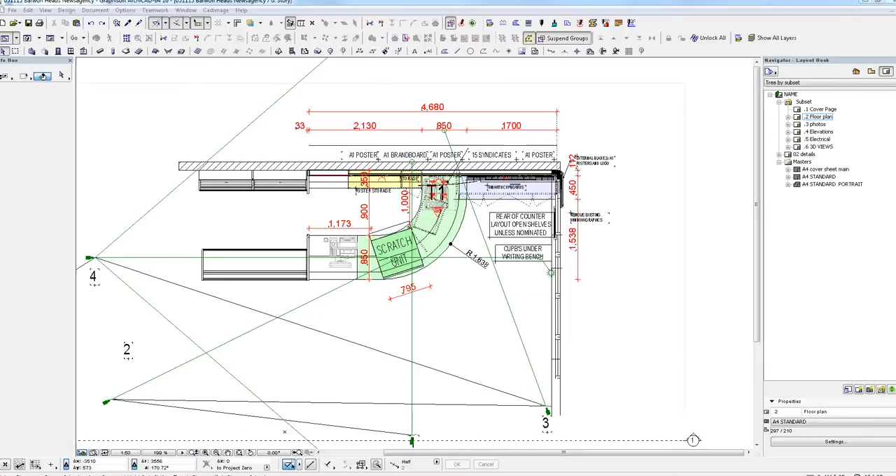Okay, this is the job you do. Upon opening it up, I can immediately see something wrong with it.

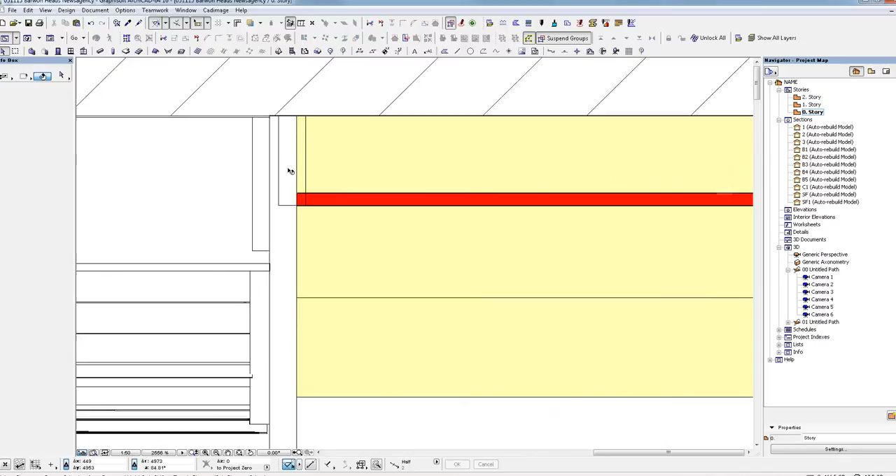This is just a hatch that should be all the way to the end there. Same with this yellow, it should be all the way to the end. When you did your marquee stretch, I'm not sure how you managed it, but you stretched this across, but you didn't take the hatching with it.

Okay, this is T1. You're missing, there's supposed to be a T2 here. There's no PowerPoints. There's supposed to be PowerPoints for each terminal.

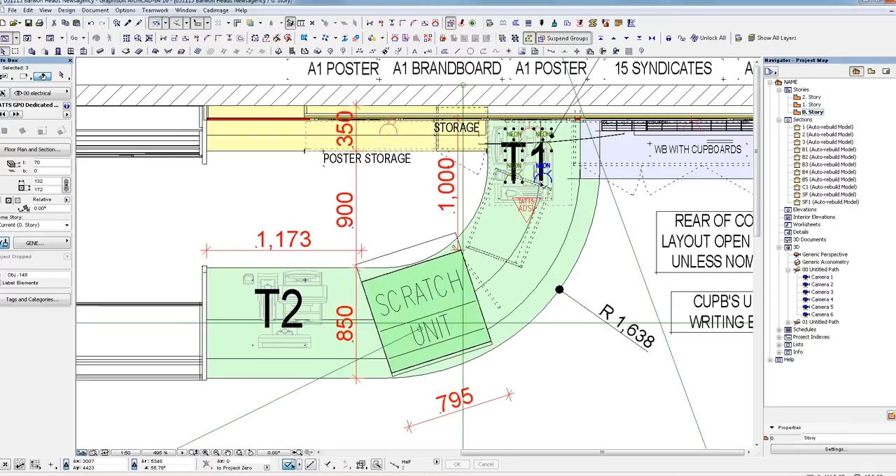Essentially, I guess this is a C grade. I'll pause the video for a second, and what I'll do is just load up the image.

This one only has a space for a second one, and if you look at the photos, it looked like they never did an upgrade to this one here. They never upgraded to that style.

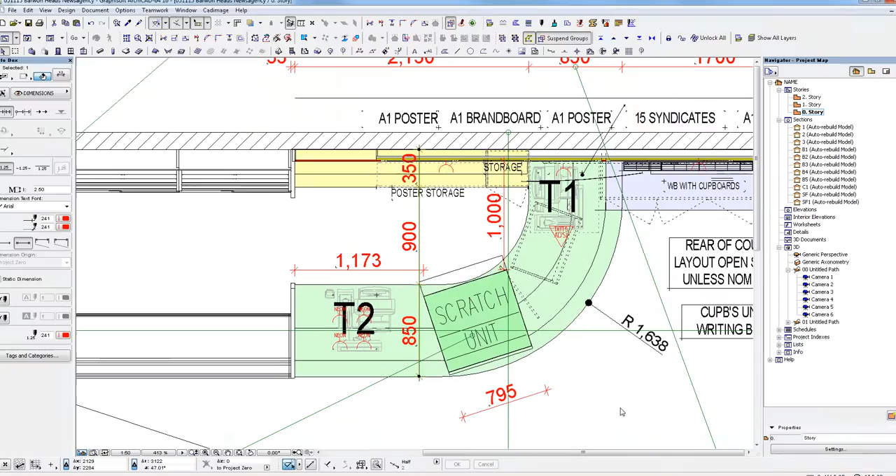You see my doorway here? The way I can see that it's a door, I can see that it's a sliding door. But with your one, I can't see what it is.

So this is the final plan that you sent. I'm not actually able to see what's going on there. I don't understand what's going on here.

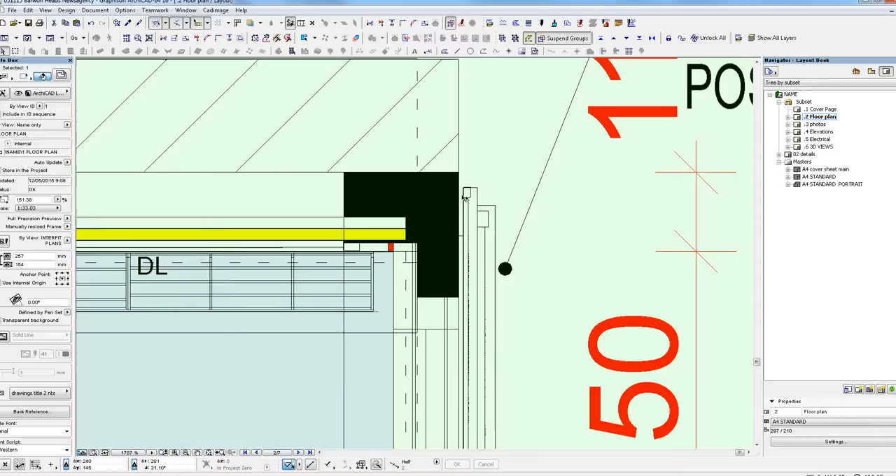I get that sometimes there's some funny things going on with the profiler, and it does mess up a little bit. I'm going to go back into working space now.

You've got, I can see that's the red panel, and for some reason we've got a poster here.

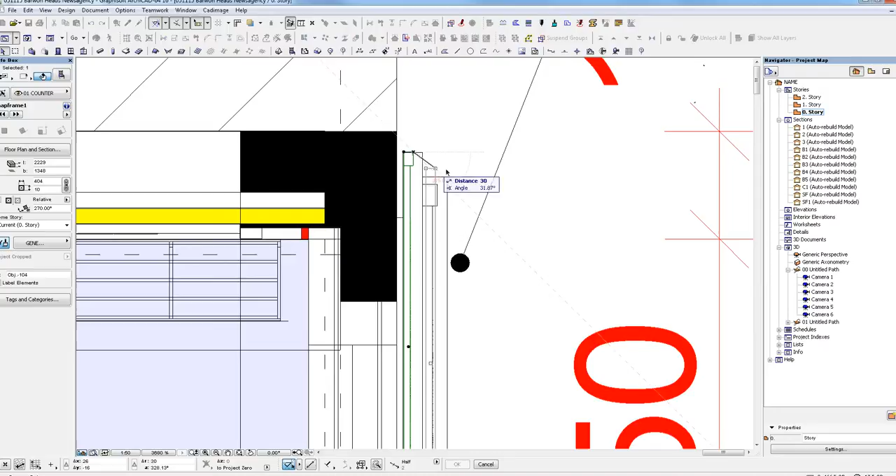So let's just have a look at that in 3D. I'll just quickly look at that in 3D. One thing you should always do is actually look at your drawing in 3D.

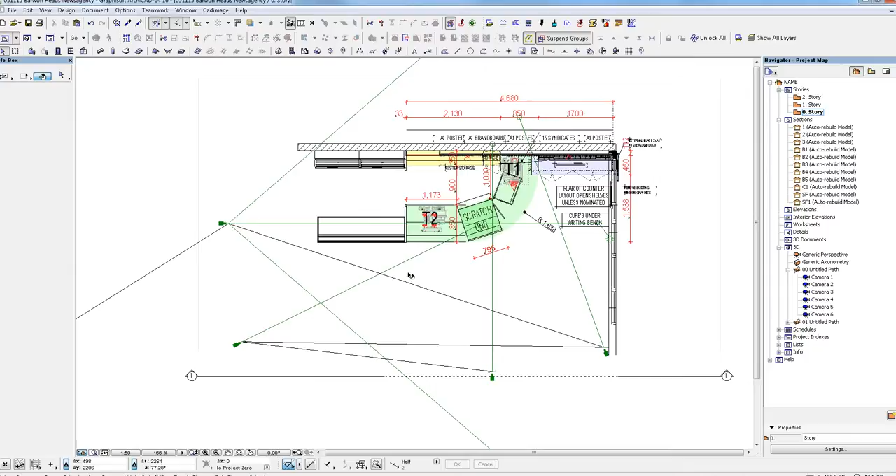These numbers that you put here, I don't want numbers. You don't need numbers. Don't move numbers, just move. It doesn't matter what is what with those.

For this one, what I would have done, let's see, number one, I would have put one there and one there. Just forget about this, the shape counter is just all wrong anyway. It's all wrong at the moment.

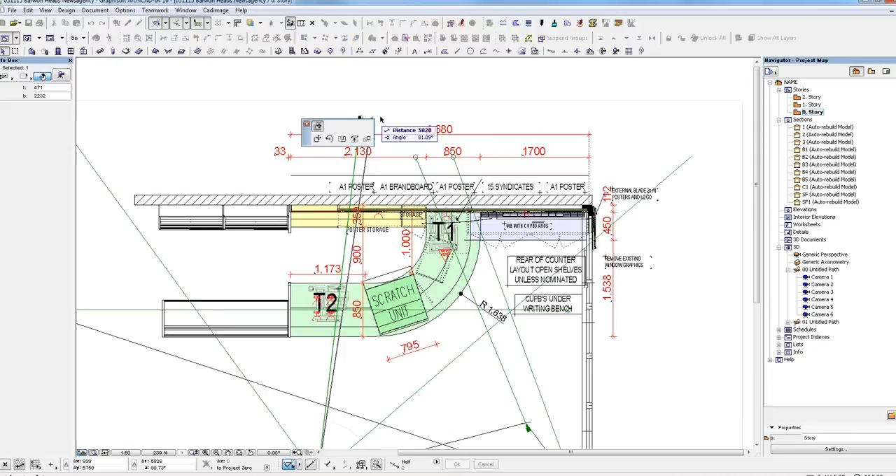So I will redraw it on video so you can see it. Now, you need to have one camera looking from the outside of the shop, looking in, so that we can see this blade.

So you don't, that's one too many cameras. You don't need an extra camera. So that's all you do, you just place the cameras. The main focus is this area.

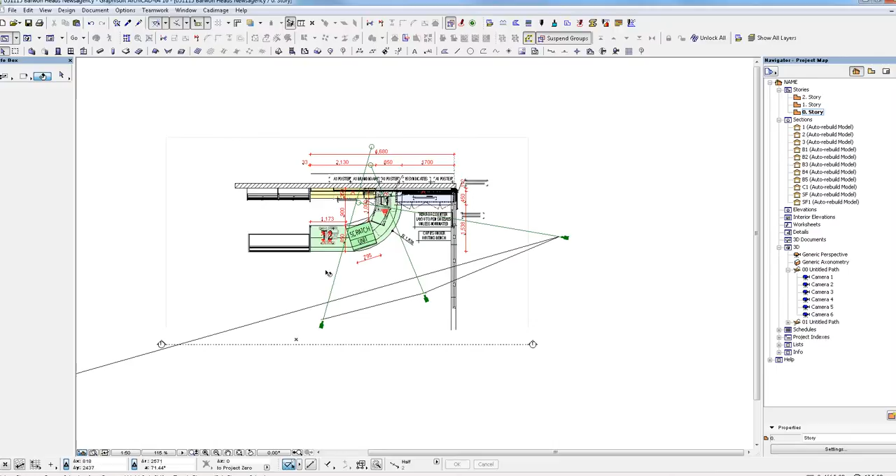Now I can see you've done line drawings for these. Yeah, don't do line drawings when the counter—

Hang on, because you deleted it, I've got to put it all back on. So that's fine.

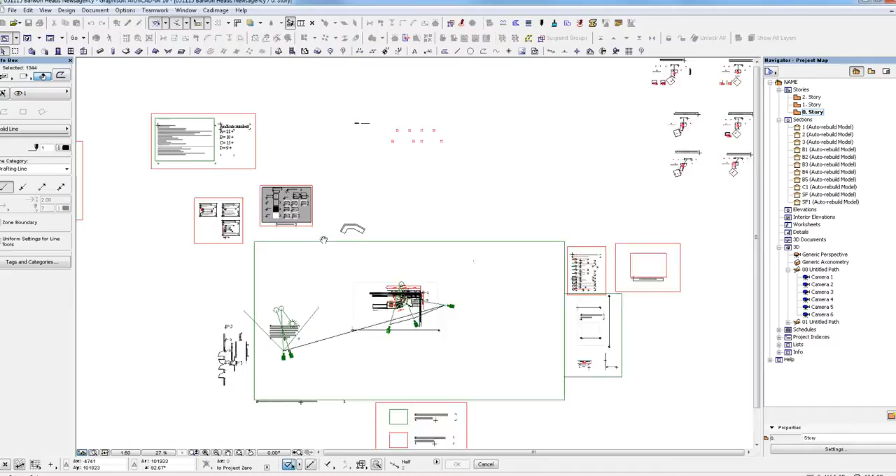Drag it. The counters are here, and you can just grab this existing counter, bring it down, and drop it there, and it's done. It's all done.

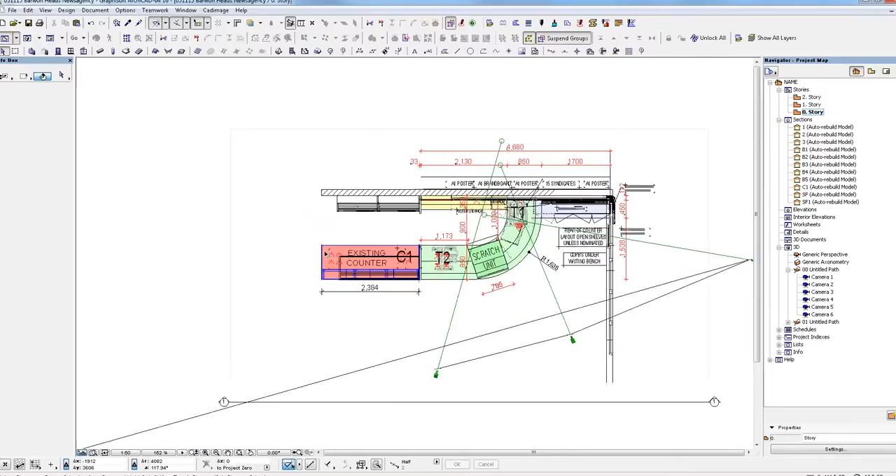You spent time drawing lines, didn't need to. You can even shorten this because it's a 850, so I'm going to take 150 off.

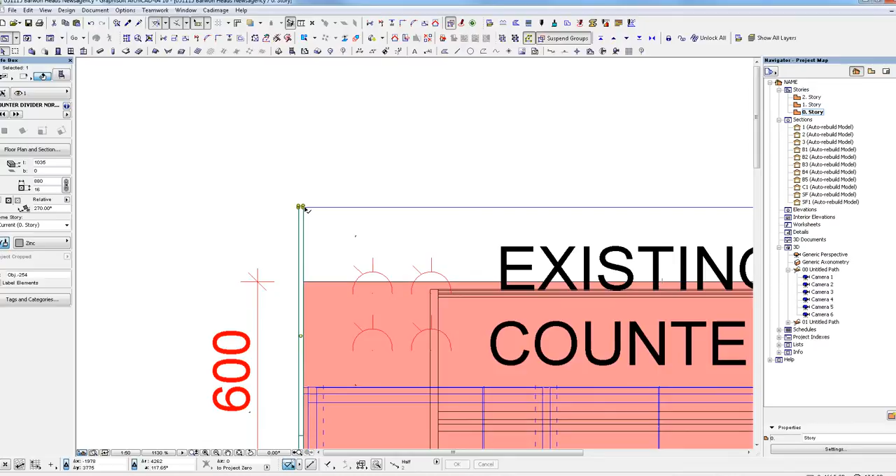If they're requesting 600 deep, it's not a request, this is what's existing. I've got one more 100. If this is existing, it's an existing 600, then you'll just use this too.

It doesn't matter, it's not important because it's existing. So potentially try not to draw anything that's existing or spend too much time on it.

But now that's all grouped. That should also, I should just delete that one.

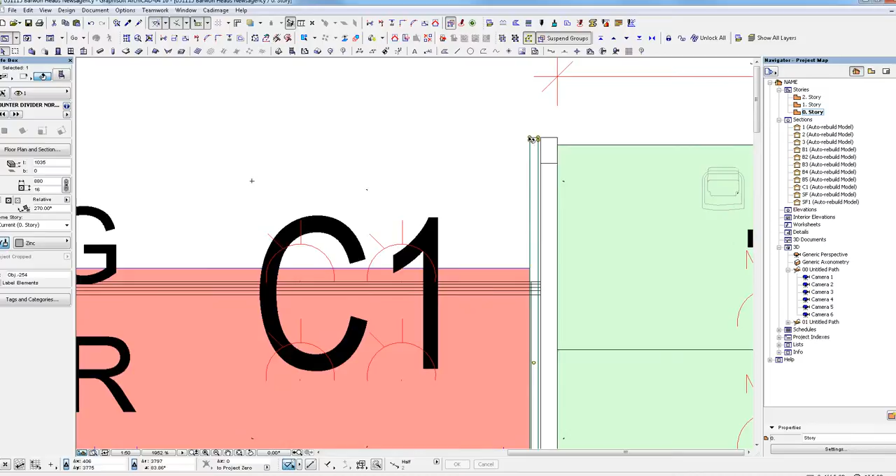But I'm sure there is a measurement for that. There isn't, there's no measurement for that. Right, cool.

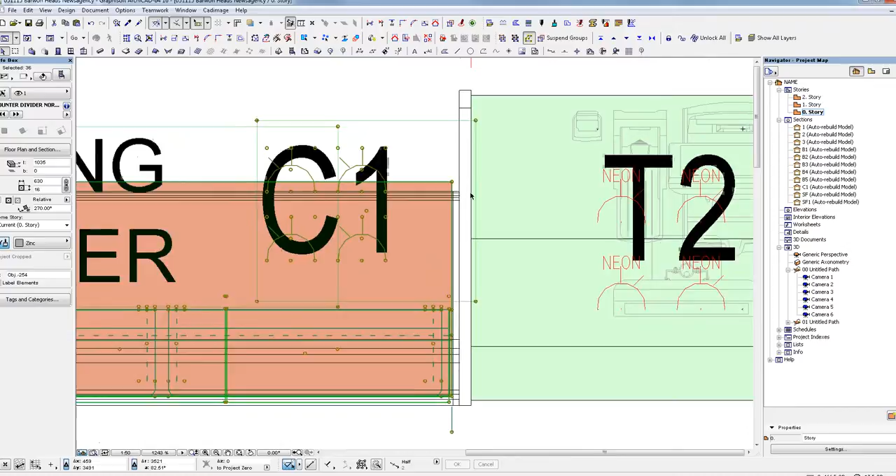Makes it interesting then, doesn't it? So just keep things easy for yourself and just use the library parts that I've got created. You should never really have to do line drawings.

Yeah, you should never have to do line drawings, so I'm just going to delete all those. I hate that, the one that doesn't turn off.

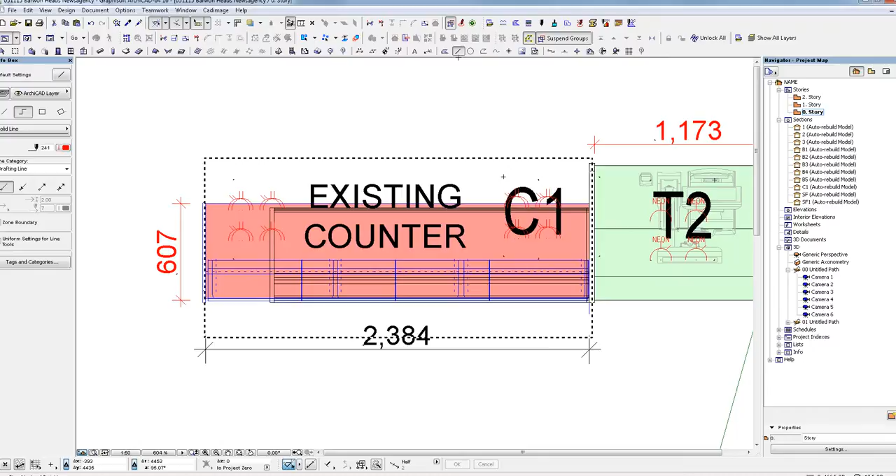Don't worry about this. When it's an existing counter, you don't need to specify where it is. Sometimes you do, but beautiful big letters, existing counters, and don't even mention it. Don't even worry too much about it. But the important thing is these measurements here.

4680 from the front to there. Now that's obviously for the back wall. So they haven't given us a proper measurement to there, so I'm just going to assume that that's in the same line.

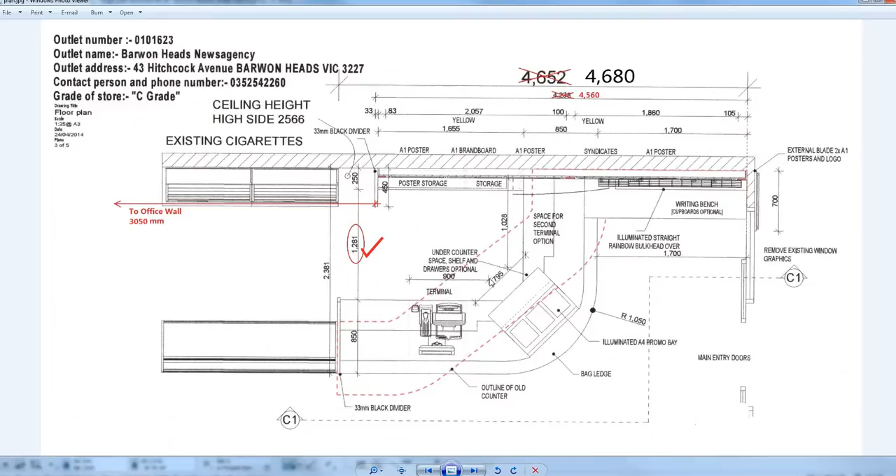This outlet that you put here is just - there's so many things missing from the very first. If you look here, A1 poster, brand board, all that, there's supposed to be PowerPoints, like one there, one there, one there, one there. If you look at,

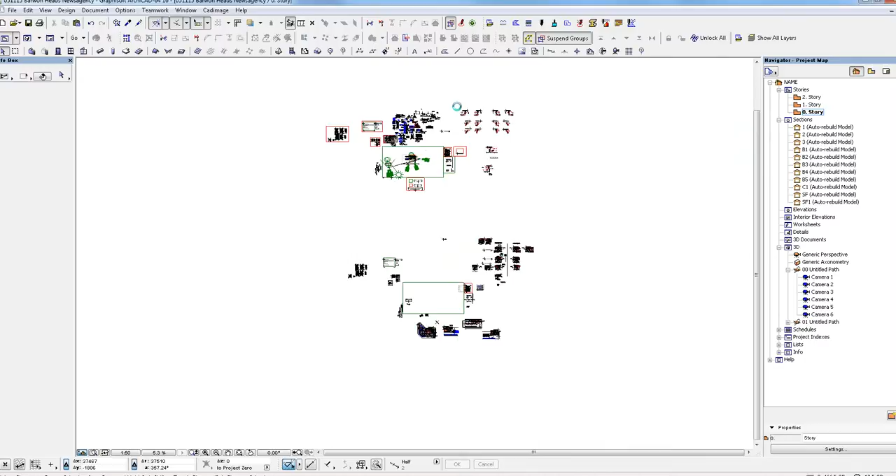What I'll do is I'll put these ones back. So yours might be different to these. Now if you see the standard, see there's GPOs there.

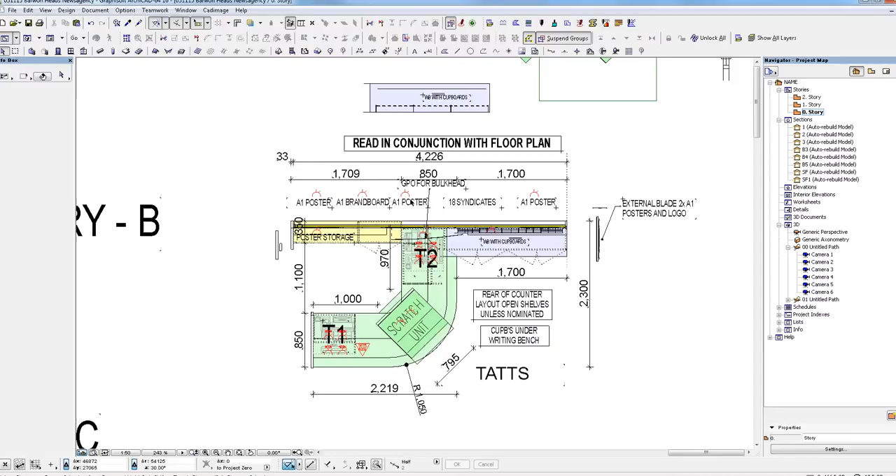I'll just pause this, I'll get the right one up, the same ones. I'll come back now, I've imported these back in again because you delete them out. So obviously you're meant to do that.

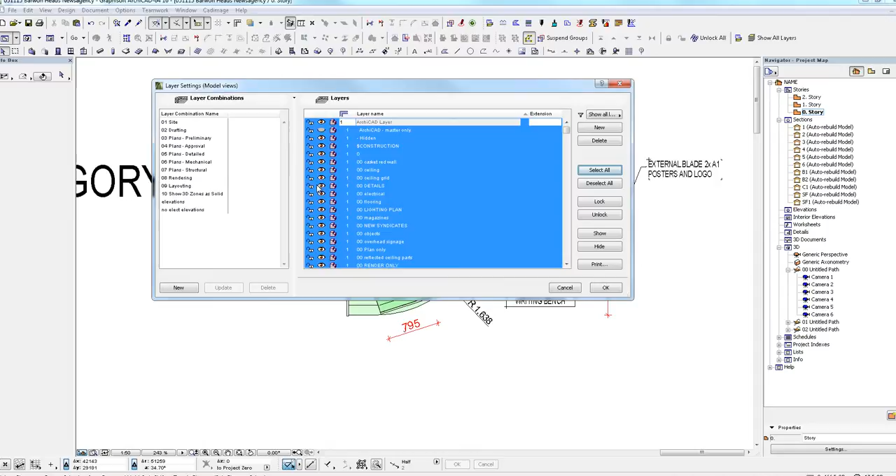Okay, they're not on there. Right, well I better fix that. Well they're supposed to be. This one was - you picked the only one I haven't got them on.

Yeah, so it's on all of them. Alright, cool, I'll let you off for that one, alright, cool.

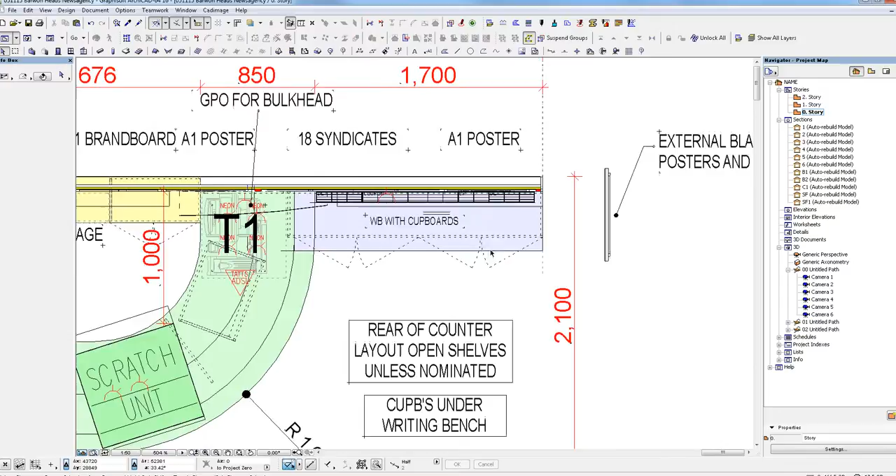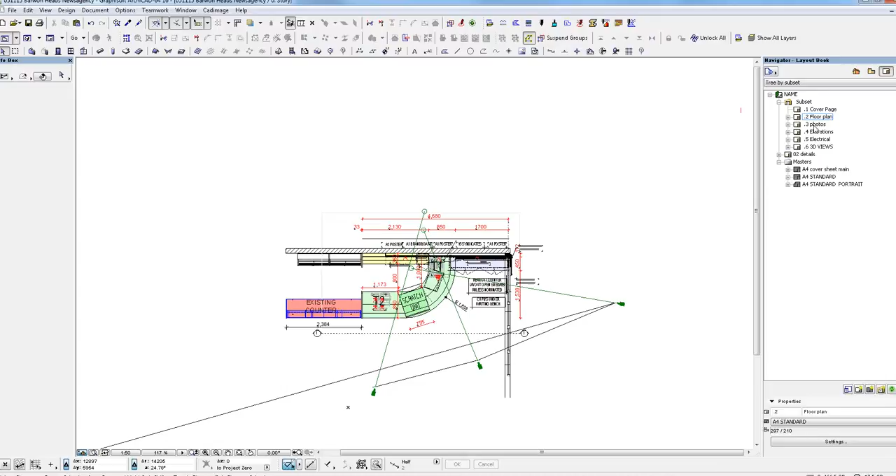So what I might do is this one here, I want you to bring these right in so that they can actually be seen on the floor plan, so that when you look at this you can see them, so that when you go to elevations it says

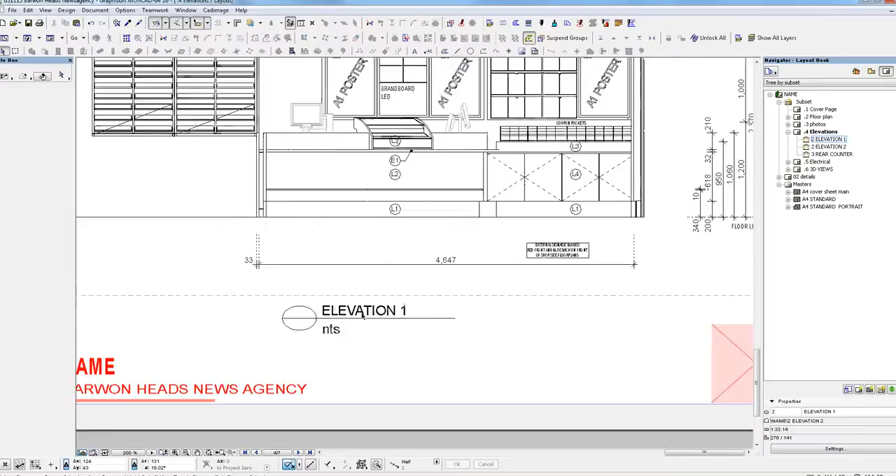Well, it's supposed to say elevation 1, but it's not saying that for some reason. Elevation 1 - it's supposed to say elevation 1, so you can refer back to the floor plan.

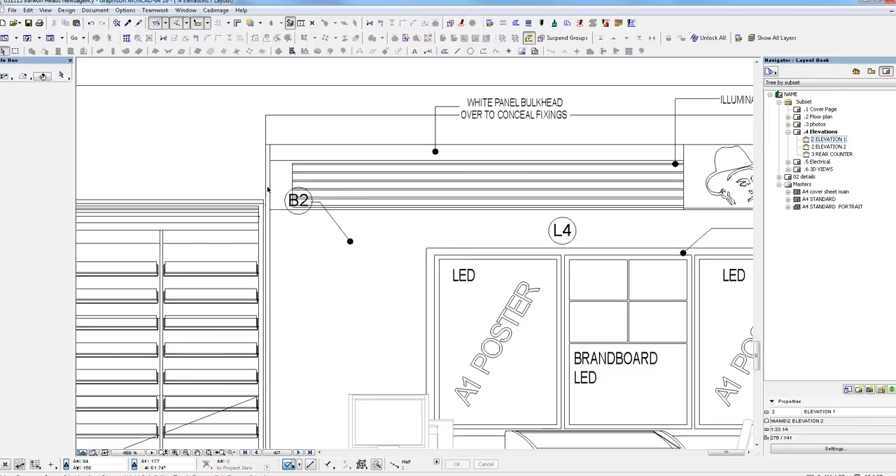Now, when I look at your elevations, you can immediately see that there's something going on here, there's something wrong with that. Can't quite tell what's going on up here. And this doesn't point to this end panel. I'm not sure what that high bit is there.

And there's no cupboards. There's no confectionery unit there. And there's a big gap. You've got your posters here, and there's just a big gap of nothing. You can put another poster there. Well, yeah, you'd have to put another poster there.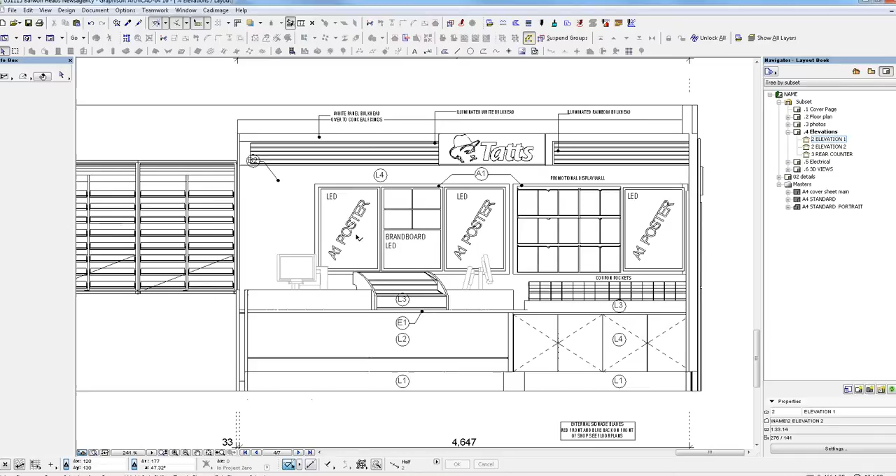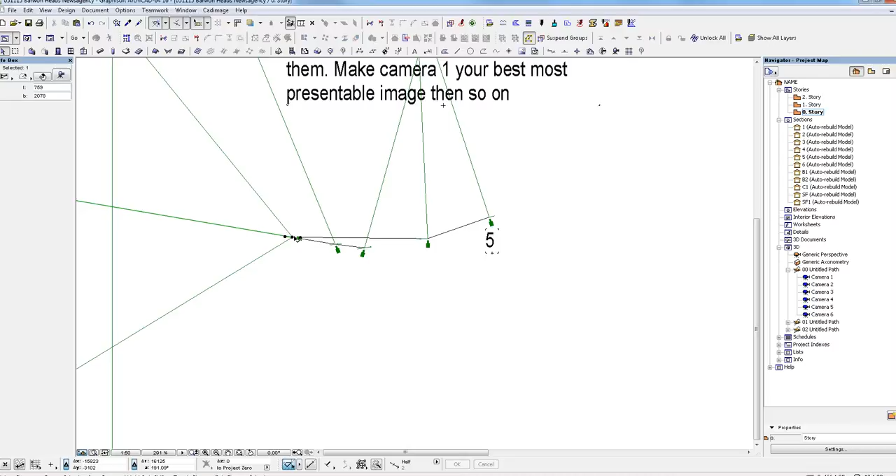But what I think I might do is just move this drawing aside, and I'll start it again, and you can just watch it. I'll just reorder these. I'll pause it for a minute. Alright, just because I'm going to be starting it now.

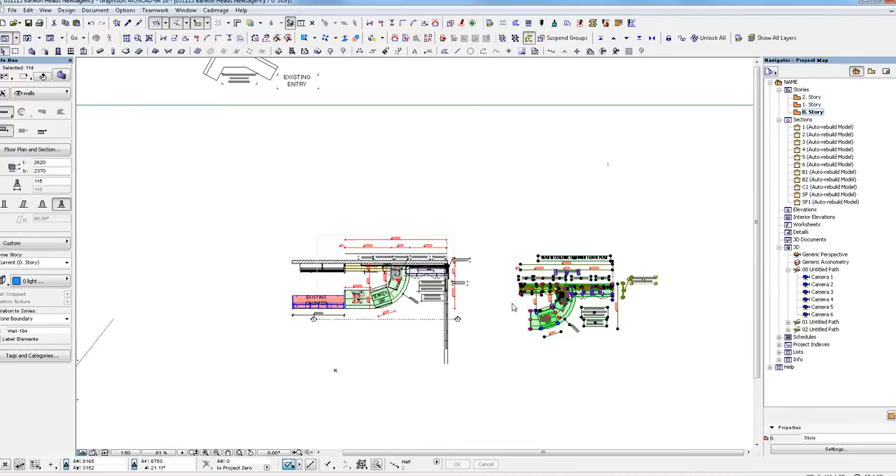I'm not sure that I can justify 4.5 hours for you to essentially copy something from up here, which was practically complete, and then move it to here, and then stretch that out a little bit, and so essentially what you're saying to me is that you spent 4.5 hours drawing all of this front part, that wall, and drawing lines for the counters, dropping a cigarette bays in there. There's not much else there that I can see would have taken you 4.5 hours.

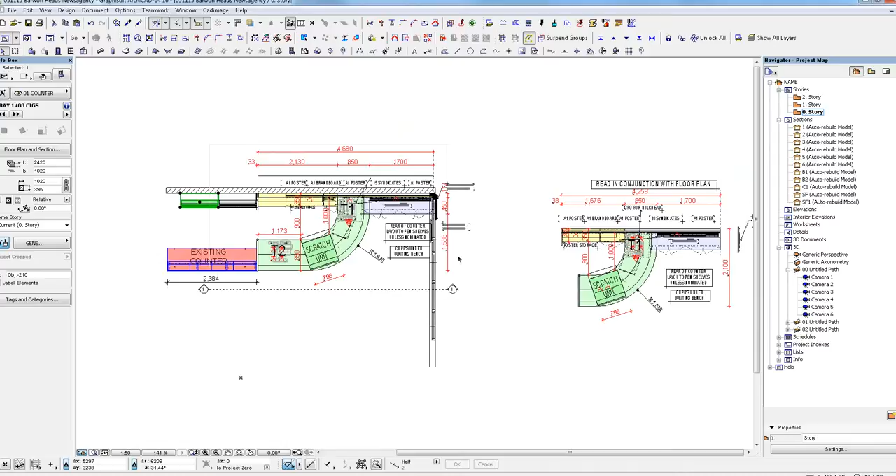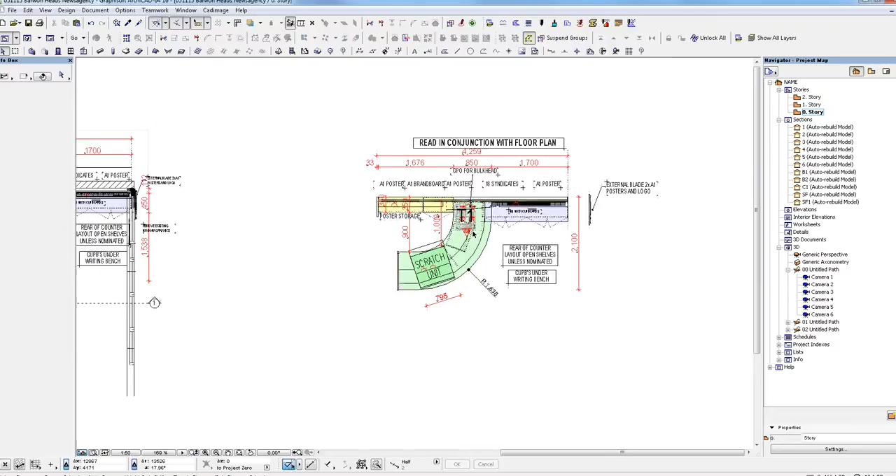I mean, I could do that in 20 minutes, basically. I guess even someone who just knows ArchiCAD in general, I'm not sure it should have taken 4.5 hours. So, let me start from scratch here next to it, and let's get it done so you can basically watch it. Right, so the procedure is, I'll pause this and start another video.